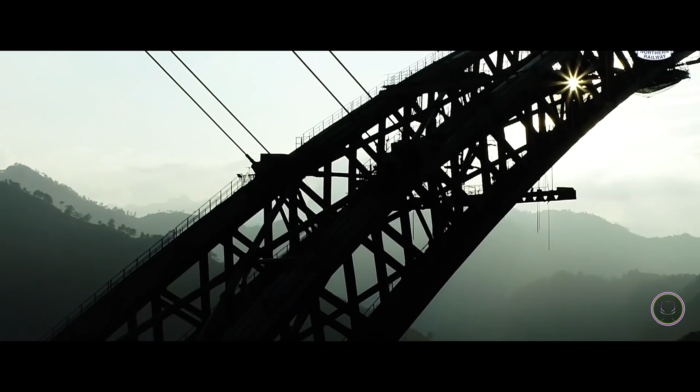In its history of 168 years, the Indian Railways is building the most challenging project mankind can ever imagine. Kashmir Railway. The Udhampur, Srinagar, Baramulla Rail Link project. The most challenging project in the history of Indian Railways. Bridges after bridges and tunnels after tunnels.

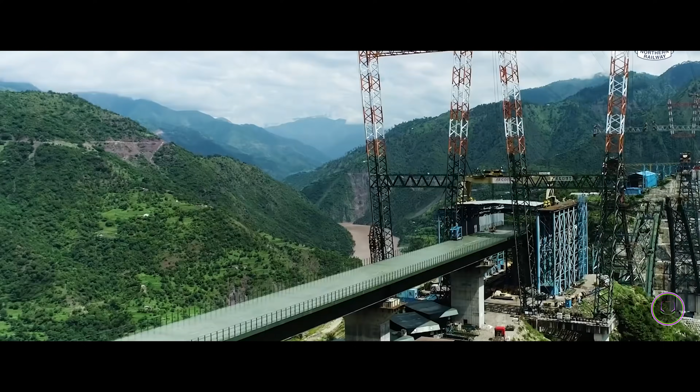Looking at this project, it seemed that not even Mother Earth could stop the Indian Railways from building this new line. Some iconic displays like the Pir Panjal Railway Tunnel and the unique Chenab Bridge all fall on this line. Chenab Bridge, the world's highest railway bridge, recently completed its arch. Work on the other stretches is also going on in full swing.

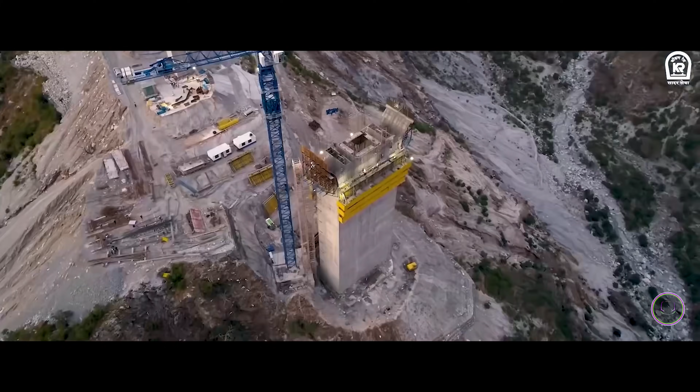But among the glory of Chenab, another iconic engineering marvel failed to catch the attention that it deserves. Construction of this underrated structure was so challenging that the engineers found the Chenab Bridge to be easier than this. It's none other than the Anji Khad Bridge. The Anji Bridge is India's first cable-stayed railway bridge, but that too in an unwanted manner. That's a long story, so let's start explaining.

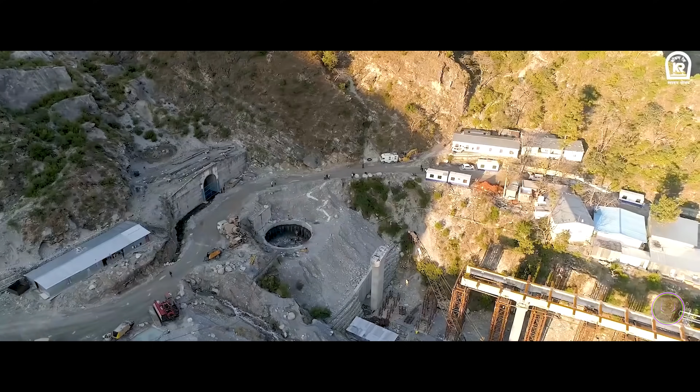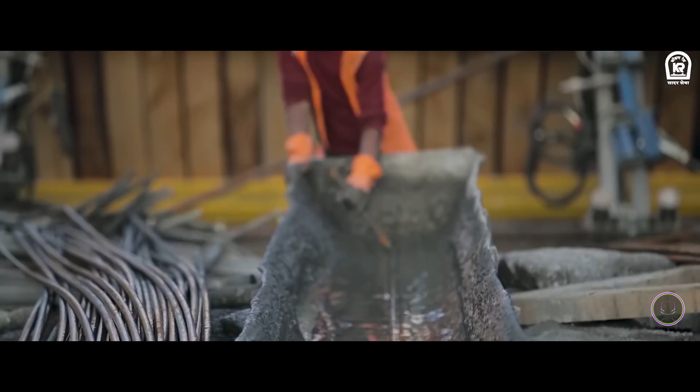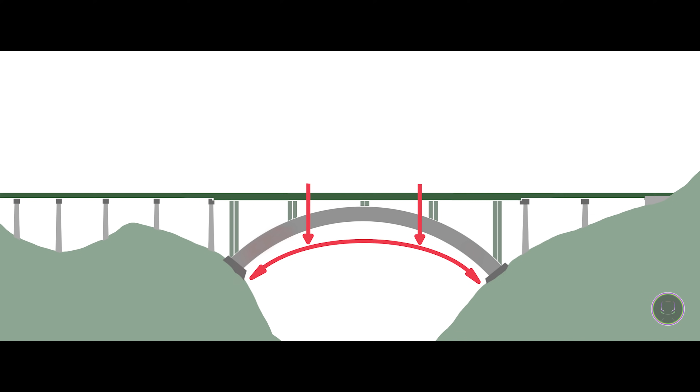The Anji Khad Bridge is going to rest on a 196 meters deep canyon near Reasi. Typically, such a height was decided to be joined with an arch bridge, which is similar to the mighty Chenab Bridge. While designing that bridge, something was discovered that became a matter of worry for the engineers. The load of the main span of an arch bridge is evenly distributed on two abutments or foundations settled on the slopes of the mountain.

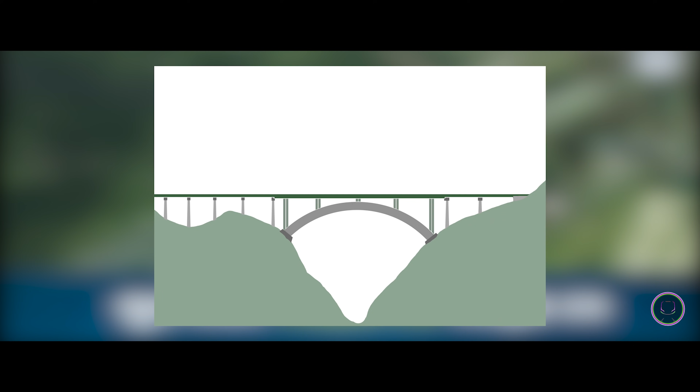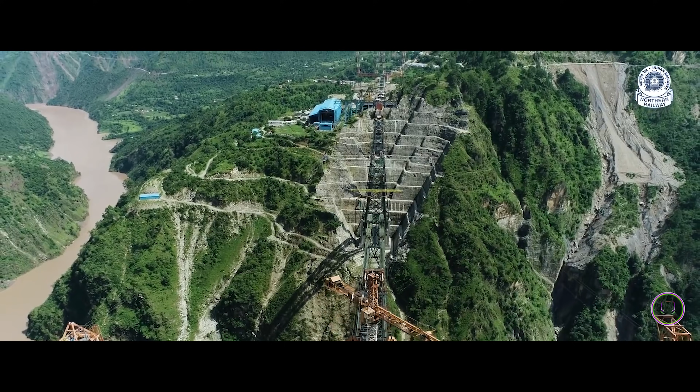But in case of Anji Khad Bridge, engineers found that the slope of one side of the mountain was extremely unstable to hold the foundation of that arch, making it impossible to build a bridge like Chenab. There is no way in which a pier or a foundation could be built on that slope. Finally, with no choice left in hand, the plan to build the arch bridge was dropped. But something had to be built there. Without the bridge, it was impossible to complete the railway project.

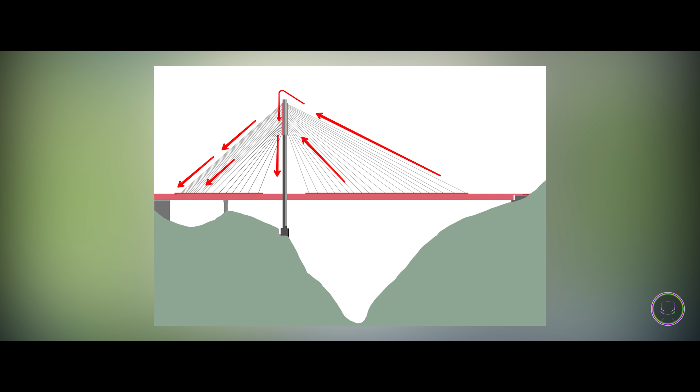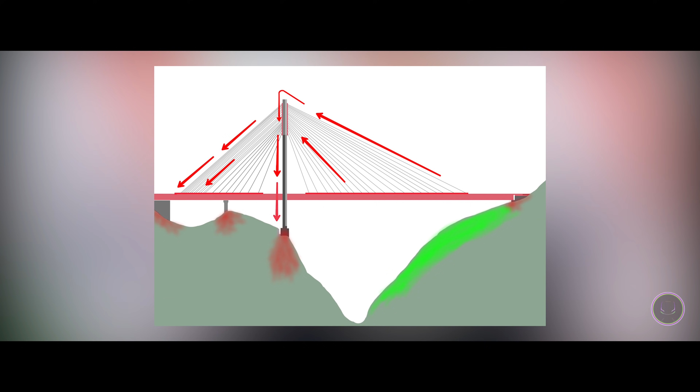Finally, a new plan was made and an asymmetric cable-stayed bridge was proposed. Unlike conventional bridges, the asymmetric cable-stayed bridge was designed to distribute almost the entire load of the bridge on one side of the canyon, just by making a single pylon. As a result, the other slope that was found to be unstable was freed from bearing the load of the foundation. Just a minor abutment was planned to receive the span. This way, the problem was solved and engineers decided to go ahead with the project.

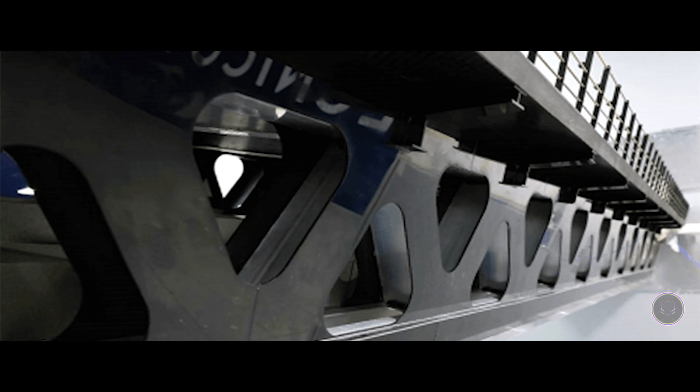Although the Anji Khad Bridge is a cable-stayed bridge, the main span is composed of a long truss and has two levels. The upper level or the deck is 15 meters wide and holds a single broad gauge track, a 3.75 meter wide service road and a pair of walkways along the edge also. The bottom level is 10 meters wide and has a second pair of walkways and cable ducts.

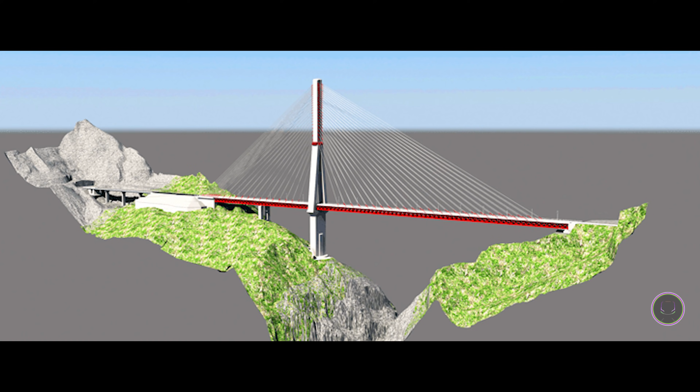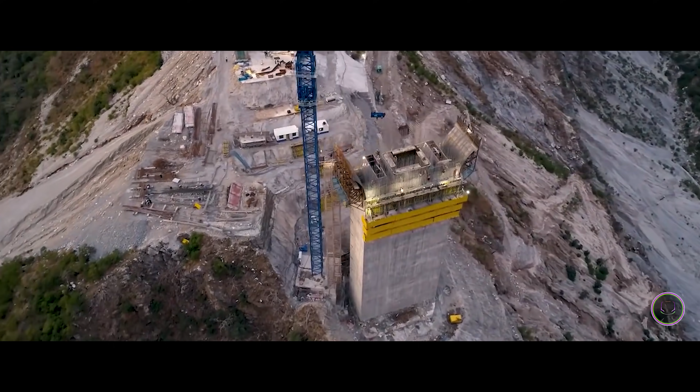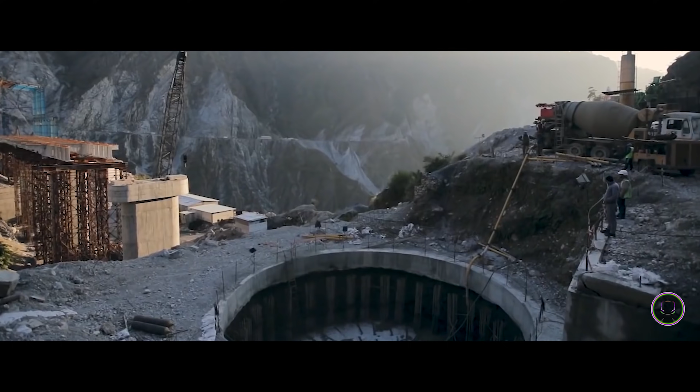Almost the entire bridge will be supported by a 193 meter high concrete tower that looks like an inverted Y. From Anji riverbed, the top of the tower will be a whopping 331 meters high. This tower will directly transfer a permanent load of 4 lakh kilonewton to the layers of rock underneath. This tower will strongly hold the load of the deck with 96 cables.

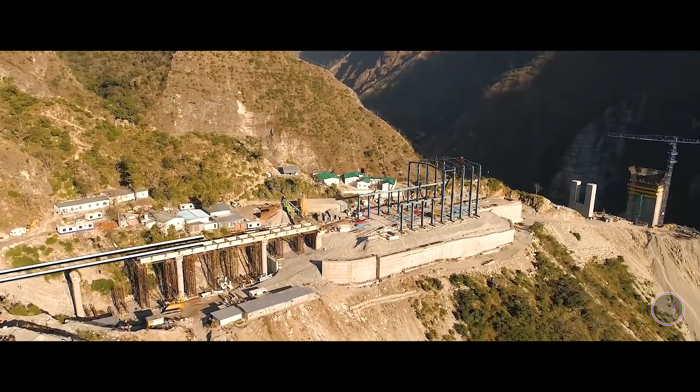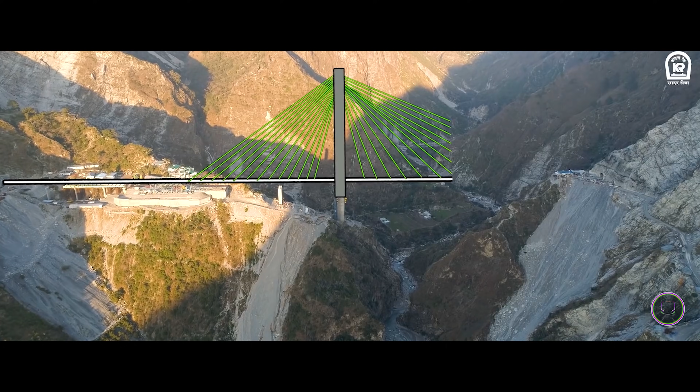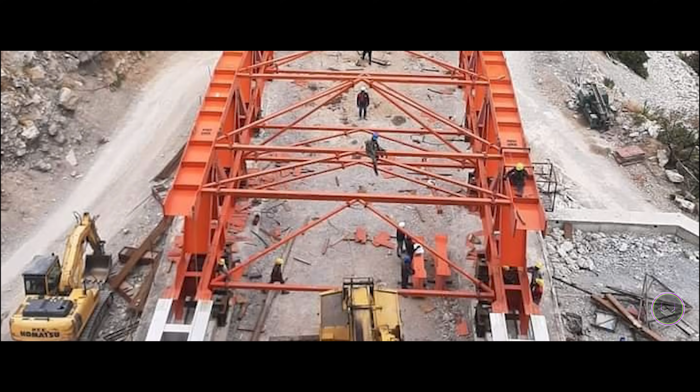The length of the critical span of the bridge is 473.25 meters, whereas the longest span will be 290 meters. If you add up the approach viaducts, then it counts up to a length of 687 meters. A fabrication unit has been set up on the stable end of the bridge, where large trusses of the bridge are being assembled. As the erection of the tower is completed, these trusses will be launched one by one from one end. But we need to wait for a long time, maybe a few years, to see the bridge being shaped like its real form.

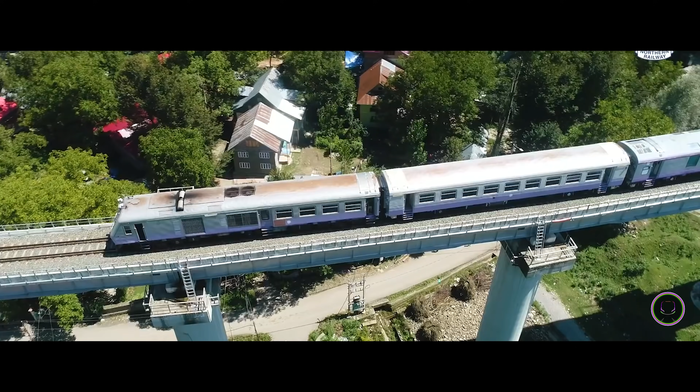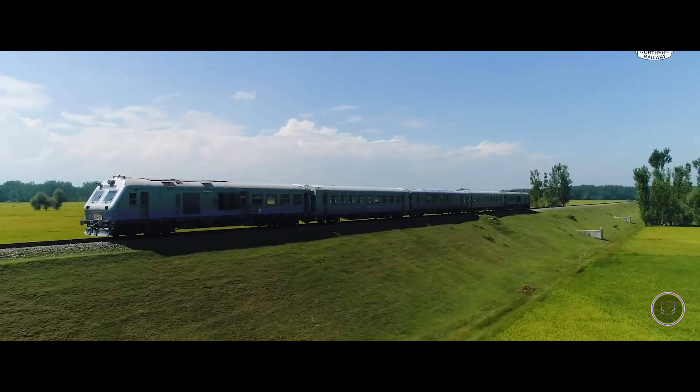Although the mighty Chenab Bridge is way ahead, the country's dream of joining Kashmir with railways now depends on Anji Bridge. The Indian Railways is spending 458 crores on this bridge. That must have increased due to obvious reasons. As it turns into a reality, trains will clock a maximum speed of 100 kmph there. The structure is strong enough to deal with heavy storms and strong winds as well.

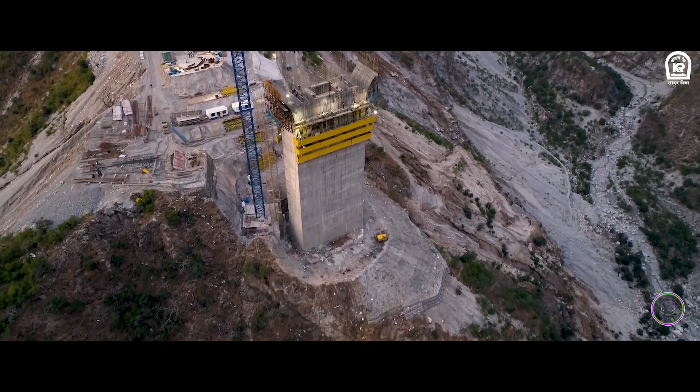Parts of Kashmir's Udhampur Srinagar Baramulla rail link are operational. But this critical 111 kilometer section between Katra and Banihal is now swinging to shape the project into reality. Tunnels after tunnels, bridges after bridges. Such a railway project will definitely become something that India can be proud of.